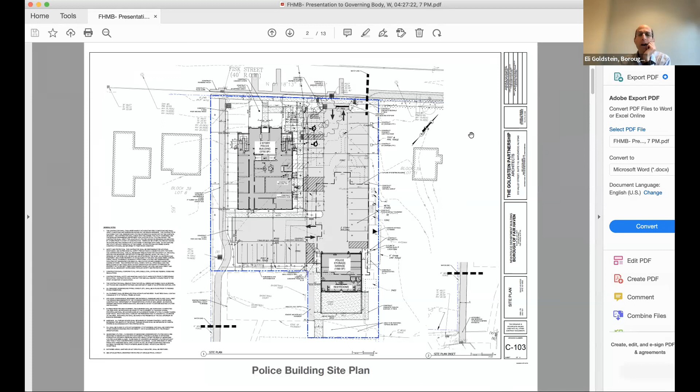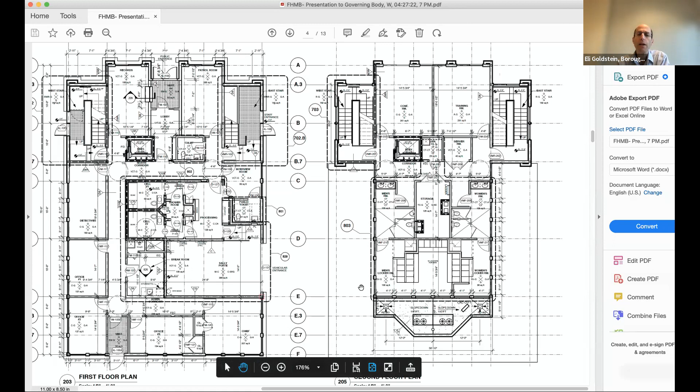And then there's an outdoor, relatively flat roof in the back here, which will contain most of the mechanical equipment, the HVAC equipment for the building. And that's pretty much the organization of the police department.

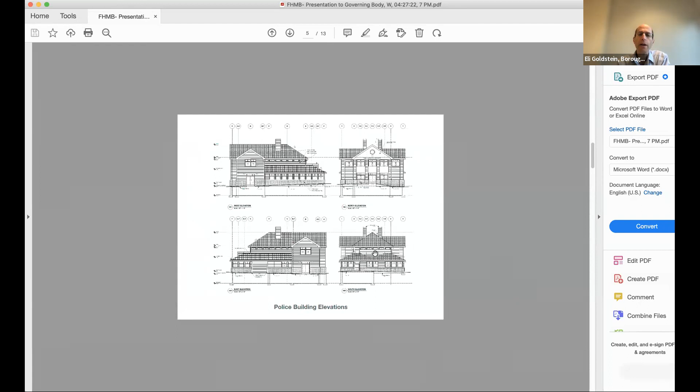On to the next slide. These are elevations of the police building. This is the side that faces Fisk Street, the north.

This is the west side facing the walkway between Fisk and the park. This is the east side with the garage door for the sally port. And this is the south side where there'll be an entrance for the staff to come in from the parking lot. Materials are meant to be residential in scale.

We have residential shingle roofing, residential siding, residential scale windows. And that's pretty much the picture for the police building.

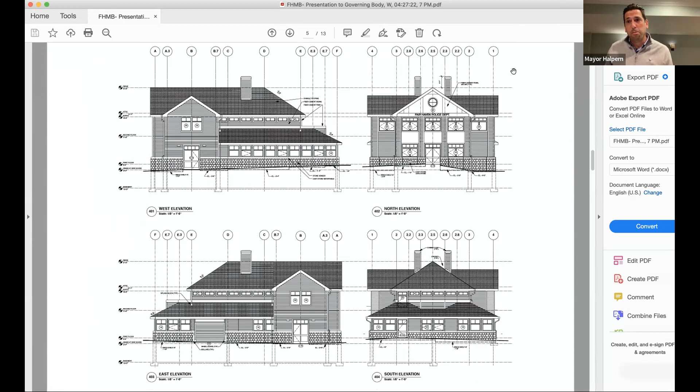I'm going to go in the same direction I guess I would if we were in the basement at Borough Hall. Assuming Councilwoman Christner Keefe is ready to go, if you have any questions for Eli. Can I actually go last, Mayor, if you don't mind? Okay, I guess I can move from the other side of the dais. And Councilwoman Cole, are you prepared with questions? I am prepared and happy to kick us off. Great, thank you, Mayor. Thank you, Eli. Thank you, Rick. Appreciate you being here tonight.

No particular order, I'd like to just dive in a little bit. Do you know the square footage of the community center room that's currently in the PD? Just the one main room. Something tells me, I don't remember exactly, but I think it's something like 1,000 or 1,200 square feet or something.

It's all right, an estimate is fine. It must be about right, I've spent enough time in there.

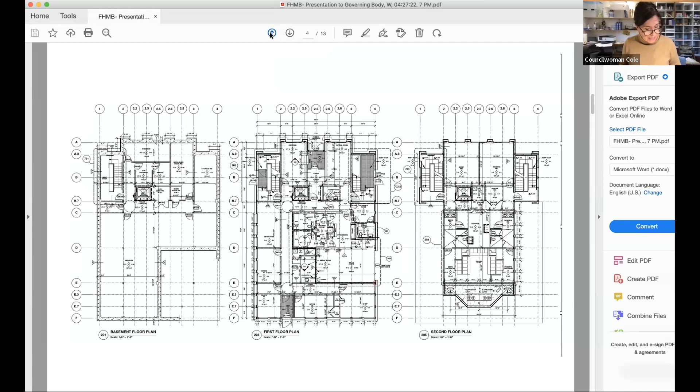So if we could look at the site plan. One of the things we can't see on the site plan are all the adjacencies. There's a reference to residential on both sides. But what we can't see is that to the south, we have basketball courts, a playground, tennis courts, and the fields area, which is a connection that the community really enjoys between the PD and the kids' activities, family things. So it's very important that we maintain that connection.

I know that we have a sidewalk here on the western side of the site that leads to the fields, past the basketball court into the fields. And I also think I'm seeing a fence. So could you please tell me, it appears as though there's a fence between that sidewalk and the building as proposed.

If I may, there's a post and rail fence just to separate the two uses, so to speak - to separate the path to the park from the police function. It's just a post and rail, a 3 or 3.5 foot high two-rail fence, similar to the fence that currently exists between the basketball court and the parking lot in the police parking lot.

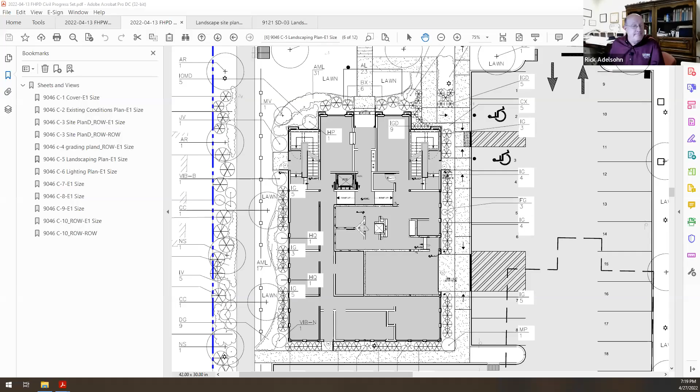I have more slides than Eli does. You want me to stop sharing? You'll share a landscape plan? I certainly can. Let's see, I need to find share screen. I need to share that screen. Share. Did that share? Looks like it's starting to. There it is. Yeah, okay. I feel so much better.

Landscape plan was top of my list. Why don't we have a landscape plan? So on this western edge, the west side of the sidewalk, are those existing trees? Because I know we do have a nice...

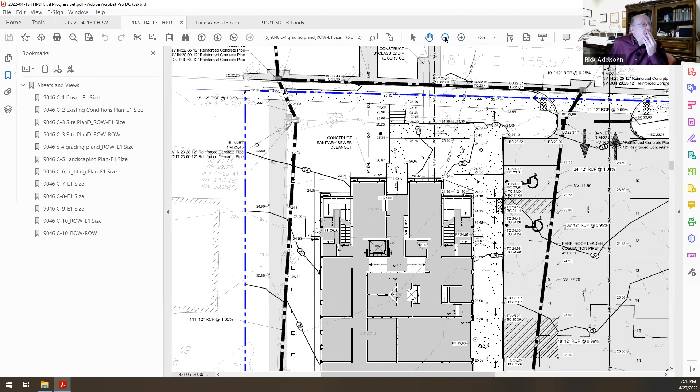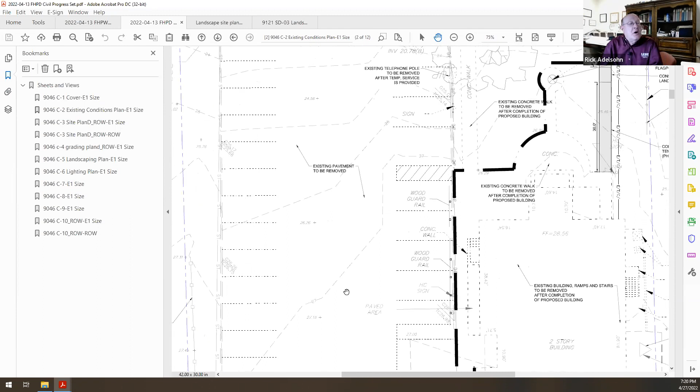Question at the moment. Can I figure this out? Let's see. So I believe we're actually removing the majority, if not all, of the trees on site as part of this project. Unfortunately, the alignment of the driveways and things like that don't allow preservation of the trees between the grade changes and the alignment. So the trees are proposed to be removed.

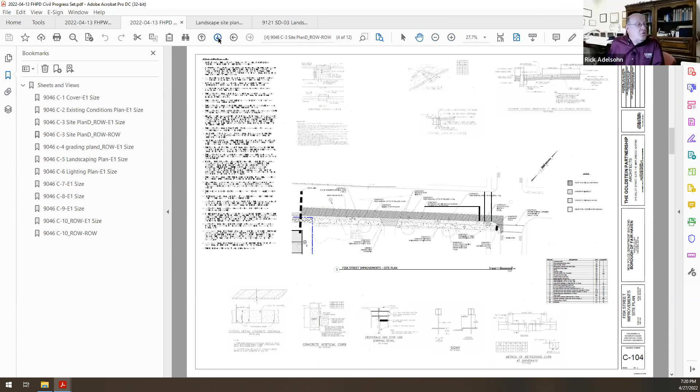So that stand of trees that exists now, you're saying their removal is necessary because of the grade change between the sidewalk and the grade changes? Yes. But if it were not for that pathway, which of course we need a connection, so I'm not saying we shouldn't have one, but if it were not for that sidewalk, would we be able to keep those existing trees? Yes, there is drainage piping going through there that should be clear of the trees, but the sidewalk is the driving force. It's the major one, okay.

Also note there's an encroachment on that side, with the neighbor's property encroaching onto the police property. So that gets cleaned up as part of this as well. Okay, well that's probably best. I'm not sure, we'll come back to this.

So when I spent some time looking at this, there's some terrific little opportunities. If we could look now at... well, one thing before we leave the site plan: there's 7 parking spaces on this south end, and there is no through traffic there. I just want to dog ear that, so when we come back to it, we understand why that's important.

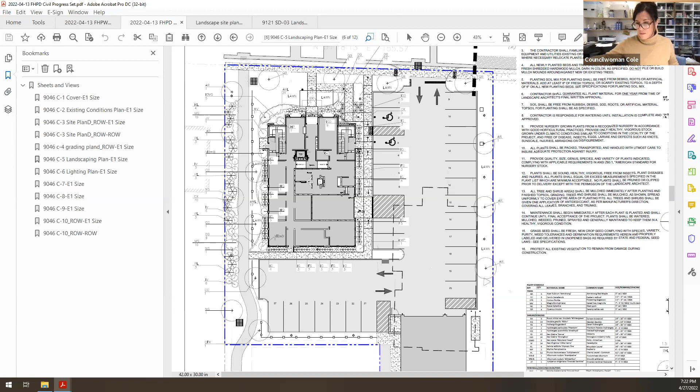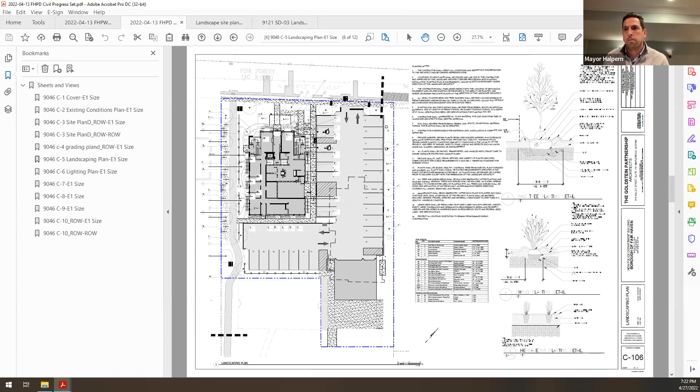Could you please look at the storage building floor plan with me? I guess the question would be, Mayor, do you want to talk about the storage building as part of the police building complex or deal with it separately? Yes, if we're talking about the police storage building, let's talk about that along with the police department. Okay, so I'm going to stop sharing. I should show everybody the plan so that we know what we're looking at.

Hold on. Okay, this is the plan of the police storage building. North is up. So this is a storage garage with the garage door facing north, which contains some cages for police to store equipment. The south end of it is a covered outdoor patio facing the ball fields.

And in between is an enclosed building which contains men's and women's bathrooms, primarily to serve the ball fields. And then the elevations of this very simple building. This is the north view. Here's the garage door into the garages. This is the south view, and this is an overhang that projects way out in front of the wall. And these are the side views of the building.

All right, so Eli, looking at your elevations, we could start there. I'm seeing the north elevation is a garage door, and that's not a man door there, that's a wall, right? Correct, we have a solid wall there, which is visible from the street.

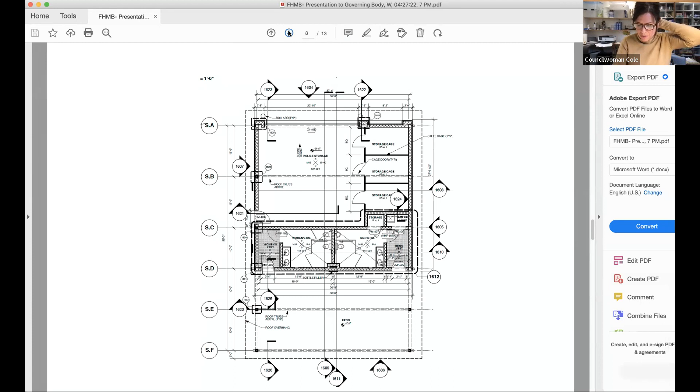Keep in mind, it's completely open up into the gable. So this is the size of the opening. Oh I see, facing south, and it's also open on the two sides.

So there's not going to be any shortage of daylight in there. Well, the gable could be enclosed such that barn doors or collapsing doors could be incorporated, should the community decide that space could be better put to use or made more optimal for additional seasons. That seems like it could still be viable.

The reason I mentioned the wall on this north elevation is because I was imagining walking through the site, and I know we want to avoid taking pedestrians through a parking lot. But one of the natural access points is probably going to be right down the middle of the site, where you would cross between this building.

If the PD is on your right instead of the left, and you were walking past the storage building, it would take you directly to the fields and the tennis courts and stuff. So I want to put that out there as an idea, because it's a very fluid pathway. Pedestrians would only be crossing that section of the parking lot where there is no through traffic.

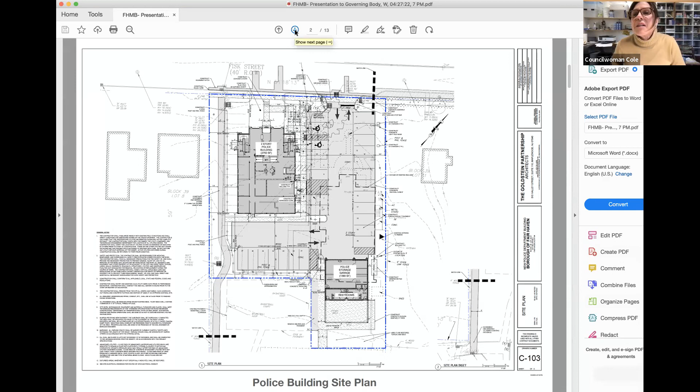We're showing 2 chimneys - I imagine we have things we need to vent, but what are these 2 chimneys doing? Yeah, those are vents. A lot of the air handling equipment is in the attic, and somehow we had to get fresh air in there. We decided, in the interest of giving this a residential scale, since we had to put some sort of vertical vents out of the attic anyway, that we would put them inside rectangular enclosures and express them as if they're chimneys. Chimneys are essentially vents of a sort too. So we needed 2 - this is how we did it.

What is the required height of the vents inside those? Do they have to stick up 18 inches, 24, 36? Well, no, because they're not heating appliances per se. I don't know that there's a minimum height, but there's a minimum distance between them, which had to do with one being an intake and one an exhaust.

So these are, it's personal I suppose, but it's a residential detail that feels a little bit odd on this more institutional building. I can see the effort to make it fit into the residential area, which it does nicely, but it also signifies an institutional feel. The chimneys struck me as slightly off. Well, keep in mind, there have to be some sort of vertical vents coming out of the roof in these locations, and we felt rather than having exposed round or rectangular ducts, that we would wrap them with something that looked a little more presentable.

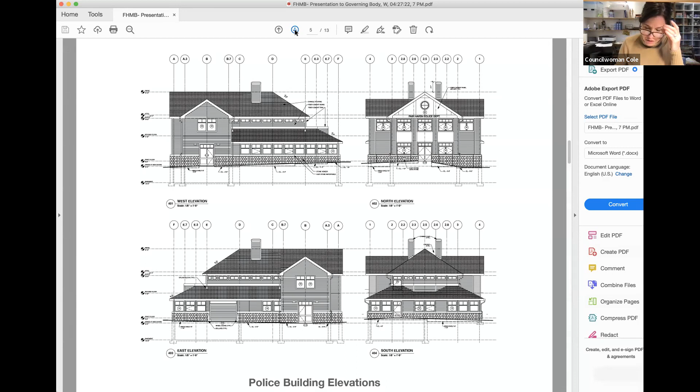I'm sorry, Eli, but on the second floor of the police building, there are two rooms toward the front. I think one says training and one says conference. Is that wall in the middle collapsible to create one large room? No, because folding partitions of that sort are not especially good in terms of acoustic separation. So you could never successfully have activities on opposite sides of them at the same time.

I attended a police training, actually to meet our wonderful force after I was elected, and everyone was in one room. I don't know that that happens a lot, but we needed almost all the space in the community center room. So that's why I was asking, and I'm sure the chief has helped advise you. I assume this entire program has had guidance from the chief, is that correct? Oh yes, absolutely. Okay, thank you Mayor, that completes my questions and comments.

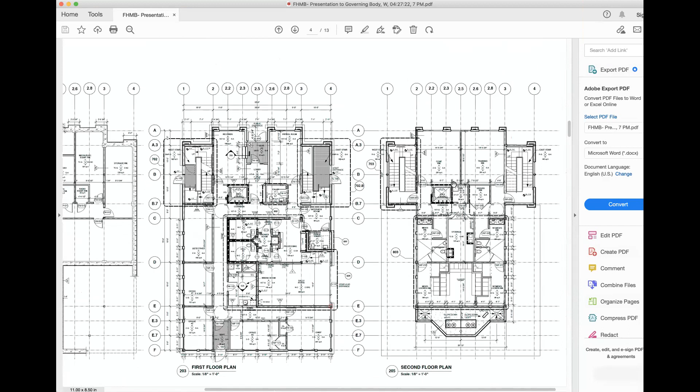Yes, thank you Mayor. I just wanted to touch on a few things that Tracy brought up, and maybe we can answer some of the questions she's had. One thing we're trying to do is keep the police department open until the new building is completed. Can you talk about the impact on the sidewalk, the trees, the landscaping, and the fortification of the foundation of the current PD while you excavate and build the new police department?

Yeah, actually Rick, you could probably talk best about that. I can. So in order to build this, we are using the working area, basically splitting the site at the curb line of the existing parking lot to maintain the existing police station open. Grades and geometry were set so that we didn't undermine the foundations, because the basement on the new police building is deeper than the basement on the existing police building. So we set geometry such that we weren't undermining the foundations of the police building during construction, to allow that to proceed.

Part of the reason the trees are in the way also is because we need that for staging for construction of the building itself. We need to be able to work in that area with equipment during construction, because that path and clear space on the side of the building will be our construction working area. So unfortunately, we're on a very tight site, and keeping the police building open is a controlling factor in the design.

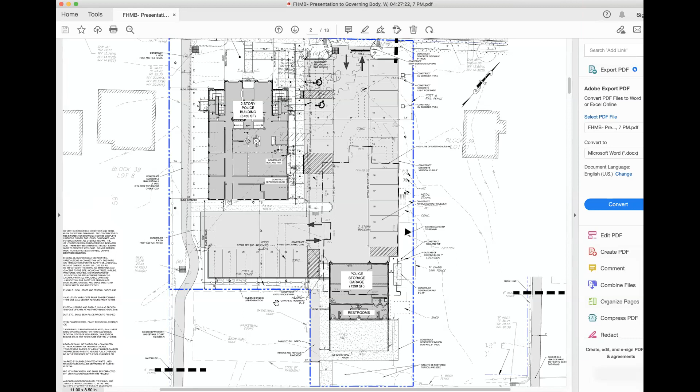Okay, so there are those two nice wide open areas. The doors are on the perimeters, right? They won't be near the water filling station. So there potentially could be those two nice... I'm not sure of the run between the charging or water filling station and the doors. It's about 15 feet either way. So a pretty nice wide open area to do something potentially for rec down the line. That's it on my end. Not too many questions, I just wanted to call out a couple things in case people were wondering going forward. Thank you.

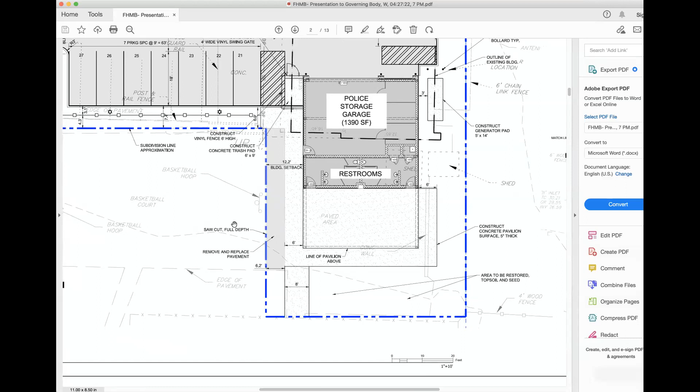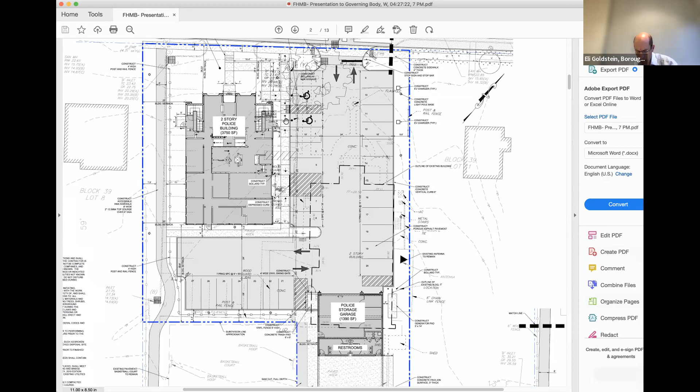Thank you, Mayor. I do have a couple of questions I'd like to pose, but not in any particular order of importance. Could you give me a comparison of the square footage between the old police station and the proposed police station? I don't have that number here. I know we issued something several months ago with those areas, but I don't have it in front of me, I can get it for you. Yeah, that would be important to me. Thank you.

I also noticed on your site plan, the interior plan, you have 2 staircases. Are they necessary? Do you need to have 2 staircases and an elevator? We're required to have an elevator to be accessible under the ADA. Right, correct, I understand that, but my question is, do the stairs need to have 2 staircases in addition to the elevator? Yes, because we need to have 2 means of egress from the 2nd floor. We have only 1 coming up from the basement because it's a lower occupancy, but we need 2 from the 2nd floor.

Can you describe some of the materials that are going to be used on the exterior of the building? Sure. Clapboard siding, aluminum clad wood windows, asphalt shingle roofing, stone base at the bottom of the wall, exposed aluminum gutters and leaders. That's pretty much it, and that's the same palette of materials we're planning to use on the storage building and the public works building.

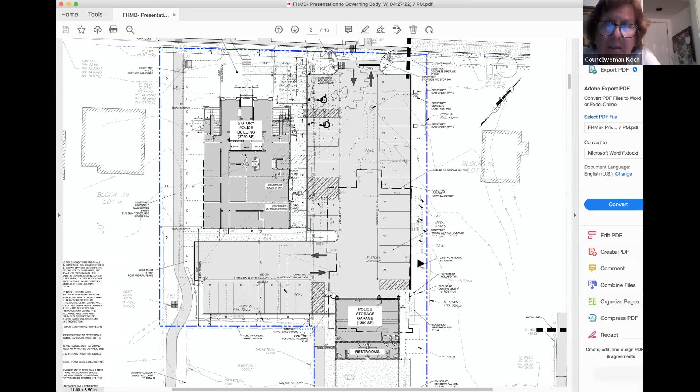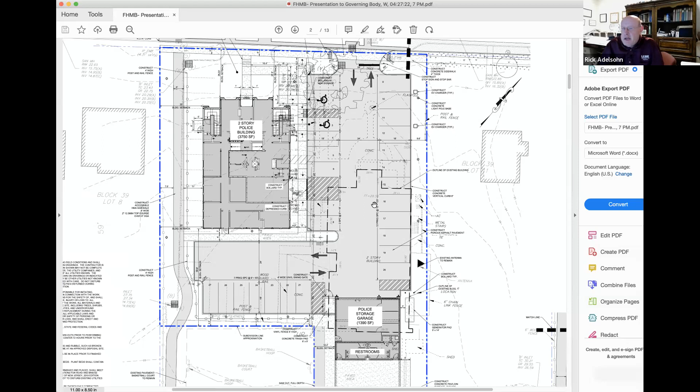And how do you get from the northwest corner of the police storage garage, once you get to that corner from the walkway, to the parking facilities on the east side of the property? You would have to cross the parking lot. Now, honestly, there's not good connectivity to the park from that area. There's a path behind the tennis courts, but that's not going to be a primary entrance the way the park is currently laid out, without changes to the park, which are not part of this project.

I can show you on Google, just to give you a better idea of how the geometry all works, if that helps. That would be helpful. Thank you. Can I share? Yeah, let me find the button to do so.

So the storage building falls in the existing asphalt pavement behind the existing community center. There's grass to the park, but the main path for the park is really on the right side, and actually there's not good connectivity to the park. People go through the field, and the asphalt paths kind of die at the tennis courts. So it's really not currently designed for connectivity between the police station and the park. It's used all the time, I've seen hundreds of kids walk through it. But it's not along defined paths currently. So by adding that path along the west side, we're creating a direct connection from Fisk to the park without going through the police station parking lot, which was one of the objectives of the planning board and the committee we were given.

Right, but that's not my question. My question is, if you were walking along by the storage shed, on the western edge of the storage shed, there's a pathway that takes you to the northwest corner of the storage area, is that correct? So there's a path, and I'm drawing in yellow, which doesn't help. No, I can see it. Let's see if we make it red.

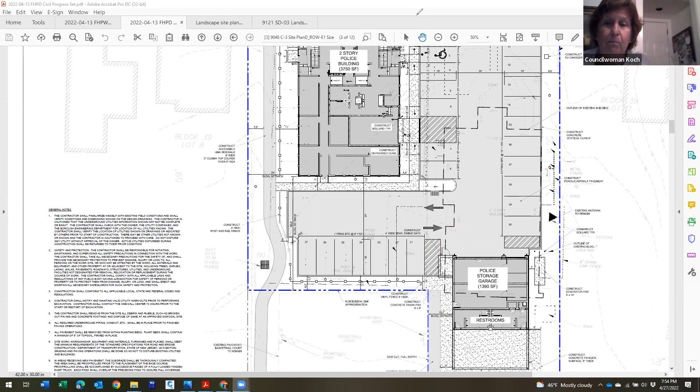I have one final question. I'm not sure, Mayor, you would have to let me know if this is an appropriate time to discuss it. But when I look at the final numbers on the final page of our packet, I am shocked at the expense we are incurring for these two facilities. While we're talking about the police department facility, Eli, if you had to scale the project back because of financial considerations for our residents, is there anything in particular you would choose right now to remove from the project?

Well, really, it's a programmatic thing. That's a question the committee would have to decide, if there's anything that could be eliminated or reduced. There's nothing fancy about the materials - they are very economical construction materials. A police building tends to be more expensive than many other types of buildings because of the nature of the construction that needs to withstand earthquakes.

I understand you have codes and standards you have to build the building to, but in terms of maybe using materials - I noticed you have stone at the lower quarter of the building, you're using Hardie board as siding, and several conference rooms. I'm just wondering, is there any place where you would have the opportunity to scale back? Being the architect who designed the project, would you be able to make any suggestions to the committee and council as to where we might scale back?

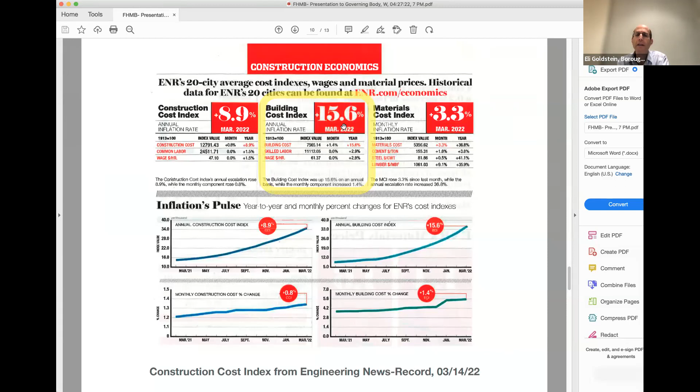So this, for everybody's benefit, is from Engineering News Record, an international magazine on construction costs. This highlighted area, from March 14th of this year, shows that the building cost index had gone up 15.6% in the last 12 months. So this is the basis for the inflation part of our spreadsheet.

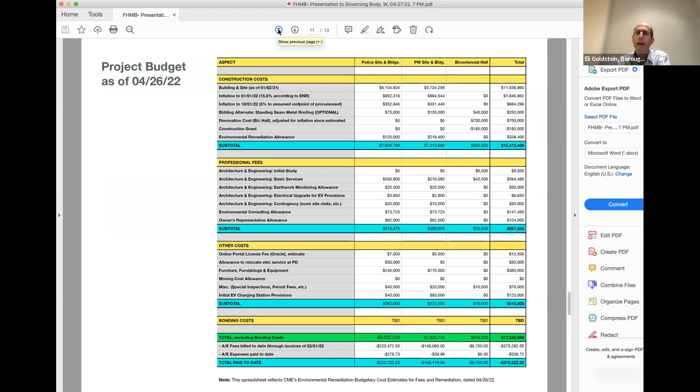Because of the shape of the site, it really doesn't lend itself to addition to the police building, especially because it was meant to serve, with bathrooms, the ball fields. There was lengthy discussion at multiple facilities meetings about the size and contents of the storage building and why it was important to build it. I'll leave it to the members of that committee who are present to answer any questions about that.

Mayor, if I can jump in. Yeah, so if we had attached that building to the police department, it wouldn't optimize the parking, and it would actually go up against the basketball court, which you can see on the diagram, where we're mousing over right there.

The idea was that the OEM, which is moving off of the DPW site and closer to the police department, is the reason we're able to potentially shrink some of the site and the building over at DPW. We didn't really get into that yet, but we're trying to work these two projects in concert to realize some economies of scale, despite what Eli mentioned, which is out of our control, including the price inflation of the materials and the construction itself.

So the best alternative, and we looked at multiple alternatives to where we would put the police storage garage, and this was the best alternative we could come up with.

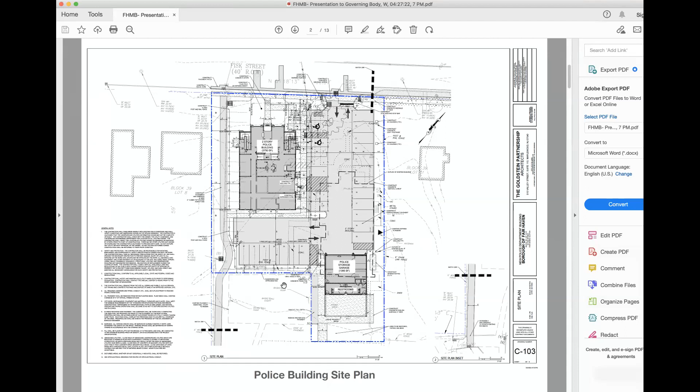I definitely appreciate it. I don't have the benefit of the discussions, but if we were to cut back on anything in terms of costs, and understand that area, Eli, you explaining that building is costing, I think about 400,000 of the total cost. That's what I understood, right? 400,000, I think you said. Yes, that's my recollection, but I can confirm that.

I do wonder how critical it is to have that location used, and whether between the police station, maybe shrinking some of those spaces inside of the main police building, or rethinking some of the DPW space, we could, I'm not even saying not build it, but just preserve that as our rec center. Because beyond these two buildings, we are going to have to figure out where to put the rec center if we lose it. That's an additional cost on top of these two very expensive buildings, given the inflationary constraints we are facing. Obviously that's not under our control, but just food for thought. That would be my main feedback, as one way to rethink that, if possible.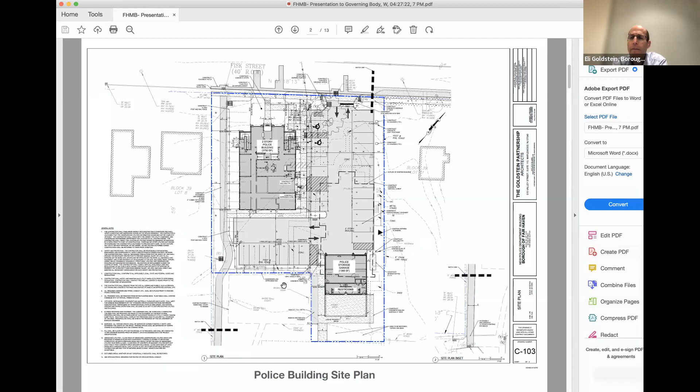So the grades have been revised so that the parking along the back, the south side of the police parking lot, is essentially at the same grade as the basketball courts now. Very similar to what it was.

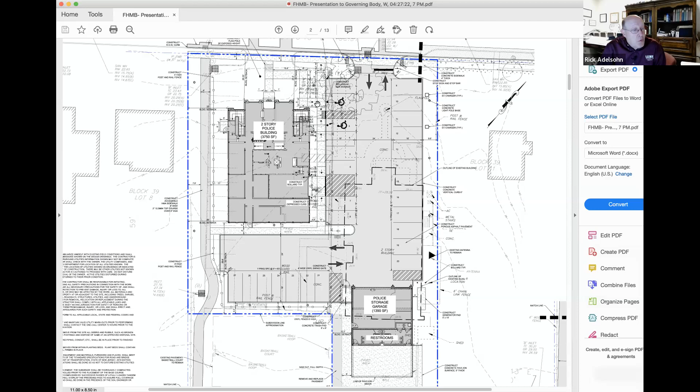We've adjusted the grades. We raised the floor elevation of the building at some point along the pathway - there's a little ramp inside the building to raise the floor a little higher. We worked out handicap access across the front. So we raised the site to make better use of the existing topography, so the grades mesh much better than they had. We managed to eliminate all the retaining walls. So if that answers the question.

Yeah, I was just trying to - I remember part of the discussion last time was there was the basement and the elevation for that. There was a little bit of a change, but yes, I'm familiar with the site and it is not level with the existing street - it slopes up. There's about 5 feet, believe it or not, between this street and the basketball court.

If you could go to the front elevation - I have a recollection that at least one rendition you had presented showed lights on the front of the building reminiscent of the existing lights. Is that just not depicted here, or has that been excluded as an option? That's a good question, I don't know the answer. I will get an answer for you.

And looking at this elevation, the two chimneys - I understand they have a functional purpose. Do they need to be located where they are? Yes, because right under them is the attic that contains all the air handling equipment for the building.

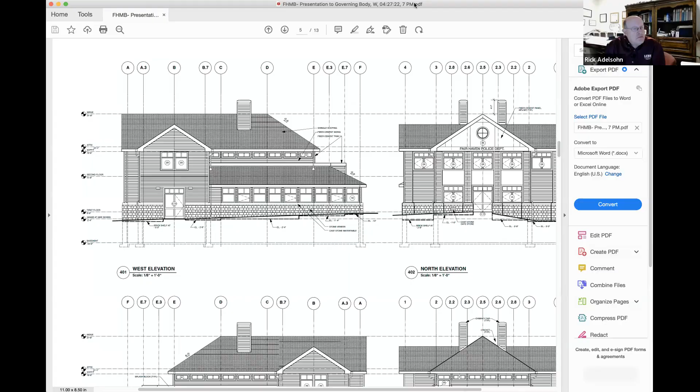All right, so this was the garage - at the request of the chief we consolidated this into one large door. But other than that, this is pretty accurate and up to date, and that's probably the lights you were talking about in the front. The color may be different because the siding color hasn't been selected yet, but this was meant to suggest pretty closely what the building's going to look like in 3D.

And with landscaping. Okay, yeah, that's helpful. Meg, do you get what you're saying about the reference to Knollwood? Yeah, that was my first reaction.

Eli, do these windows open? I believe some of them do. We wanted to limit the number that are open for energy conservation reasons, because windows that are operable, even when closed, are not as tight as windows that are not operable. So we've got, I believe, one operable window in each major space. Okay, and it's like the crank and they roll out? Yes. I think it actually might be an awning type window. Tip up. Oh, I see. Okay.

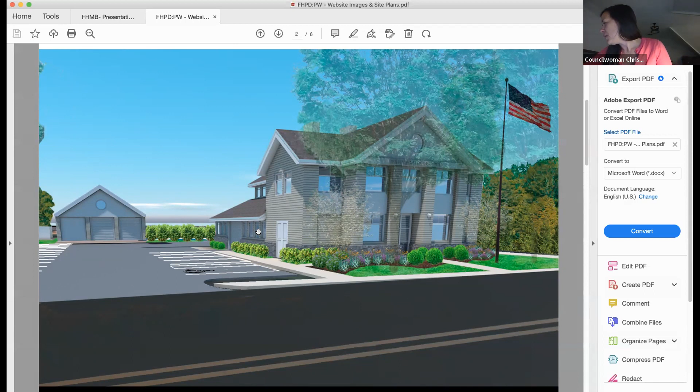Okay, and the front door style, I guess it's hard to see on both of these depictions. Is it intended to be full glass? Let me go back to the elevations.

Give me a moment. Having trouble getting back to where I was. Bear with me a second. No problem.

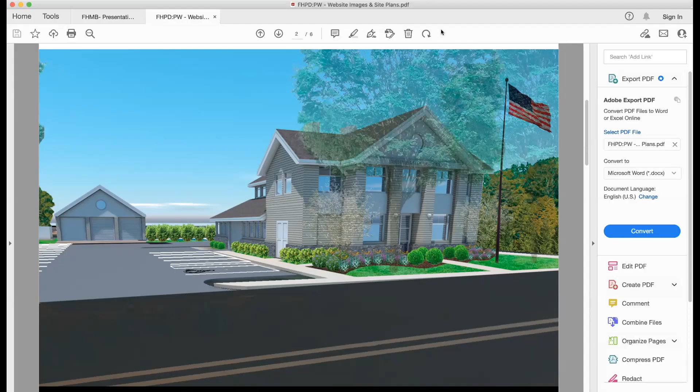You see that all right? Yes. Yeah, so here's the front door. It's meant to be mostly glass. Correct. Okay, and there's a vestibule inside that? Correct.

There's a stone veneer on the bottom of the building. Yes. There's quite a bit of it. And the reason I point this out is because it's really expensive. Of course, it looks beautiful. I'm just wondering if there would be a way to either bring the siding down further or impact that with some other type of material. I just know from my own interest in veneer that it's extremely expensive right now. Well, we probably can at all times, but especially right now. We could certainly look at using like a decorative textured concrete block instead of stone. That would be an easy thing to compare.

Okay, and would there be potentially other materials, or even just bringing the siding down as far as you could, and then with the landscaping in place, it would cover the balance? Oh, well, we can certainly look at that.

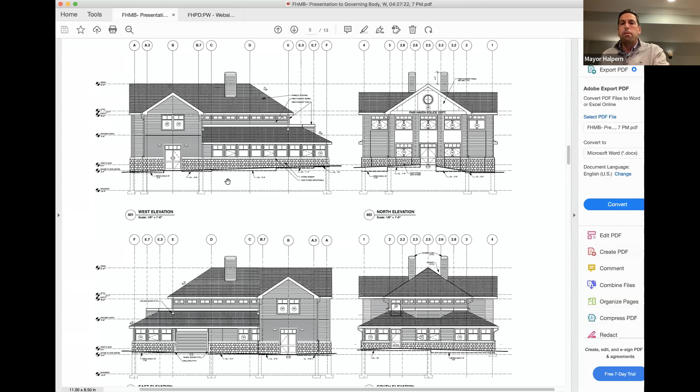Thank you. Hi, Marty, can you all hear me? Yes. Oh, thank you. All right, I'll try to make this as quick as possible and apologize because I'm looking at these plans for the first time.

Is the basement completely underground? That's my first question. Yes. Okay, so there are no windows or anything for the basement, correct? Okay, so that's one question. Another one was, and I didn't see it, but it's tiny.

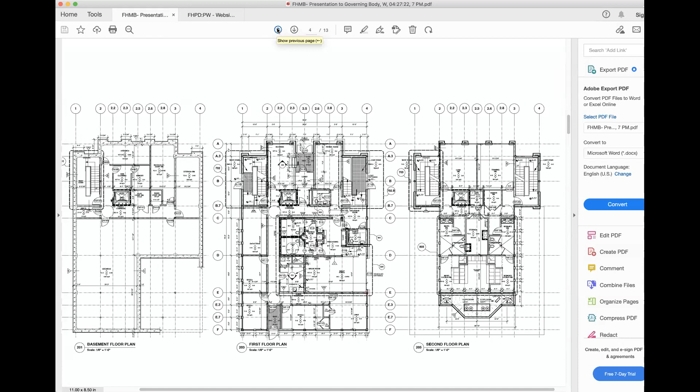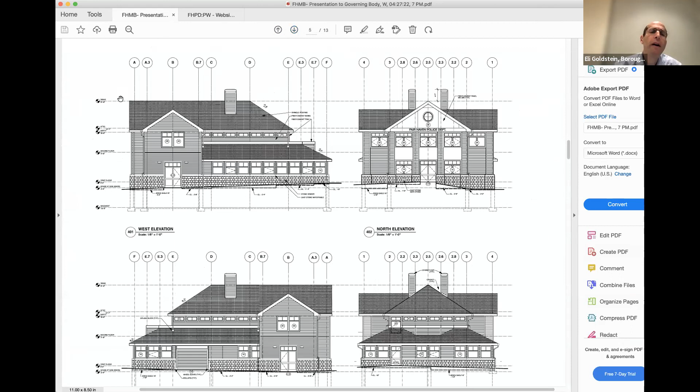What is the total height of the building with the 3 floors, with the grading? For the record, I didn't bring the measured elevations with me. I think it's about 36 feet to the peak, something like that, above grade. All right, so—oh, here it is. There we go, 31.8. It's 31.8, yeah.

And that's with the grading? Well, it depends where you measure from. That's what I'm asking. The grade of the first floor, if it's 0, it's 31.8 above the first floor. And the grade at the side doors adds another, let's say, 3 feet. So it's about 35, 36 feet total at the highest.

All right, and referencing other buildings around that, would it be a lot taller than the other buildings around it, or would it be very similar? It's similar to the 2-story residences in the neighborhood.

Okay, all right, and the heights of the ceilings, the basement and the first floor and the second floor—are they all the same, are they different? The first and second floor is typically about 8 feet. 8 feet.

And I think the basement might be just slightly less, and that's because the water table is quite high in this area. We didn't want to dig down into the water table. Rick, you can talk more about that.

Okay, thank you. And this is just a comment, because they can't speak for themselves. We're on the eve of Arbor Day, April 29th, the 150th anniversary of Arbor Day and the 50th anniversary of the Arbor Day Foundation. We're very concerned about our status as a tree city, and we've also been concerned about clear cutting some properties in town. I would mourn mature trees coming down just because it would make the staging easier. So I have spoken for the trees.

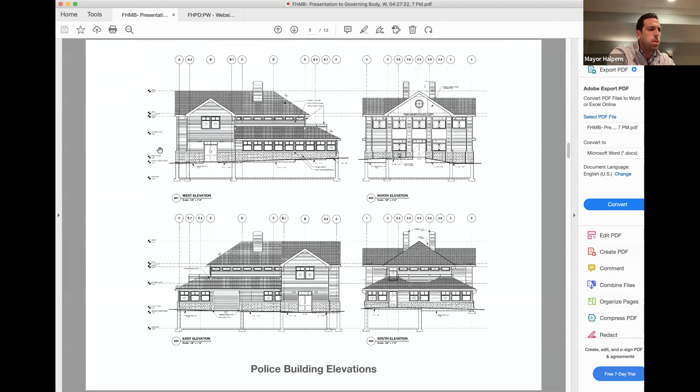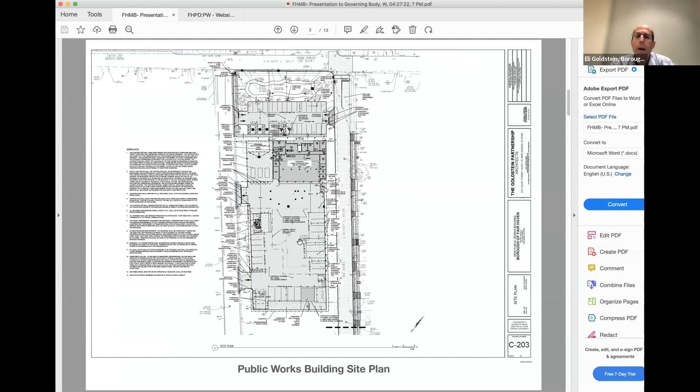Here we have the site plan for Public Works. I'll give you an overview and then ask Rick to fill in some of the details. This is 3rd Street on the north, and on this side we have Maple and Allen. The existing Public Works building is down here in this neighborhood, let's see it, I think just dotted right there. We're proposing to build a new building much further to the north and redo the yard, creating a public parking lot on the north, separate and apart from the yard to the south. The idea is separating the public from the operations of the yard, which is different from what currently exists. I'll ask Rick to fill in some information, and Rich Gardella, I believe, is on the call too, in case there are any questions about the functional aspects of the program. He can answer those. Rick?

Sure. So as Eli mentioned, let's see. Eli, can you pan down just a little bit on that?

No, other direction, sorry, to the north. Just along 3rd Street, the front side of the site, we have a bioretention basin along the front of the property.

Behind the bioretention basin, we have a 30-car parking lot with two-way access from both Allen and Maple on both sides. In that lot, 3 spaces are marked for recycling, plus 2 handicap spaces, and we have an EV charger for 2 spaces.

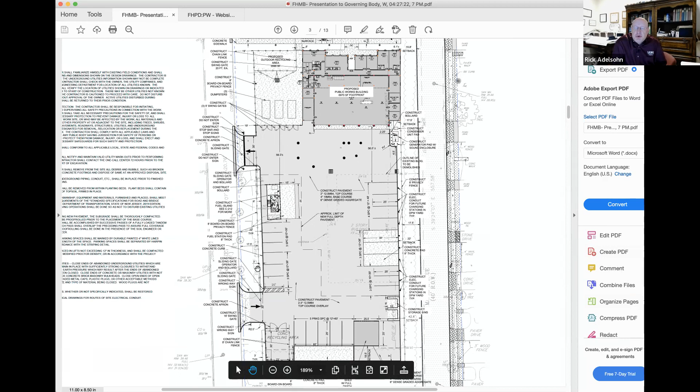Not shown here, but you'll see a series of dots in the parking lot just behind the building—we have an underground detention system there for stormwater management, along with the bioretention basin. We also have a series of water quality filters in the parking lot, because we didn't want to take water directly from the DPW yard without pre-filtration.

I think that's the highlights of this. And there are off-site improvements: curb and sidewalk along Maple, plus some limited improvements, actually a realignment.

Eli, you want to go all the way up to the top on 3rd? We are showing a narrow widening and realignment on 3rd Street to carry the curb line from the east across the front of the site, widening 3rd Street just a little bit.

The road improvements on Maple go all the way down to—I'm drawing a blank on the name, starts with an H—it's actually on the next page, which doesn't help you. Hendrickson, thank you. Yeah, I don't have it... what else?

Lastly, we have storage—I'm sorry, I also forgot the police impound pen in the back left corner of the yard. So I think that is the DPW yard. It's getting smaller than it was.

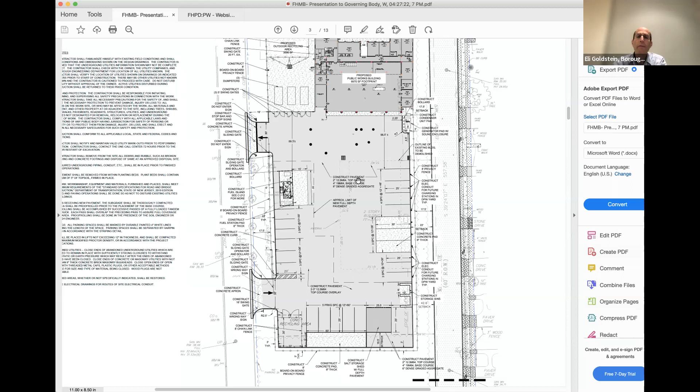Thank you, Rick. So now I'll go to the floor plan.

Here is a plan of the proposed building. There's the entrance facing the public parking lot, a workroom for staff, several staff offices, a multi-purpose room, a conference room, and this is the vehicle garage with a vehicle lift.

There's a mezzanine along the back to increase storage capacity on top and underneath it, plus various storage and equipment rooms, and another tractor garage. So there are 5 large bays and a smaller tractor garage.

And then, as Rick mentioned, this recycling area is accessible by the public from the parking lot and from the yard through these gates.

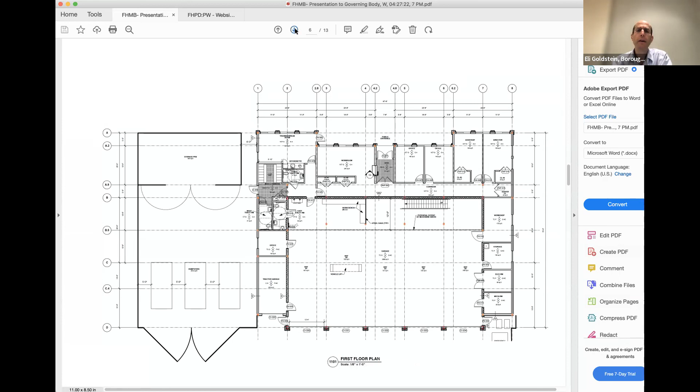If we go to the next page, these are the elevations of the building. This is the view from the north from 3rd Street—see the familial similarity with the vocabulary and materials we're using in the police building.

This is the view from the yard with the large truck bays, and these are the views to Allen and Maple on the side, using the same materials as on the police building and the storage building.

So I guess, Mayor, I'll turn it back over to you. Thank you, Rick. Thank you, Eli.

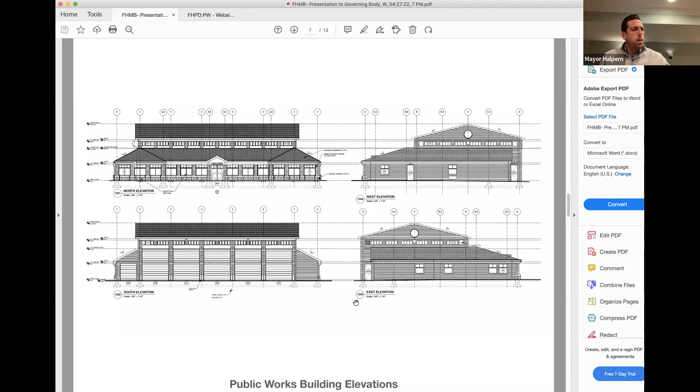Getting back to our council member questions. Councilwoman Cole, are you prepared to start us off again? Yes, I am, Mayor, the floor is yours. Thank you.

Eli, where did the program for the building at the DPW site come from? It came primarily from Mr. Gardella, the head of engineering, the town borough engineer, and Rich is on the call in case there are any questions about it.

This is a significant structure for a DPW yard. It's really nice, the layout is great. I'm counting roughly 5 offices, 4 bathrooms, 2 workshops. Obviously we need the garages. I understand the site and the layout. What I'm struggling with to get to the point is, I'll just say fancy - this is sort of a fancy structure for the DPW.

I share the concerns that both Councilwoman Neff and Councilwoman Koch expressed. No doubt others feel the same. These are very expensive endeavors. The funds the borough has committed already just to get to this stage have been exorbitant. I don't need to tell you that, I know you know what we spent. This is a very elaborate DPW building. There's nothing not to like about it, it's quite lovely, I like the way it's laid out. I just think it's a little bit too much.

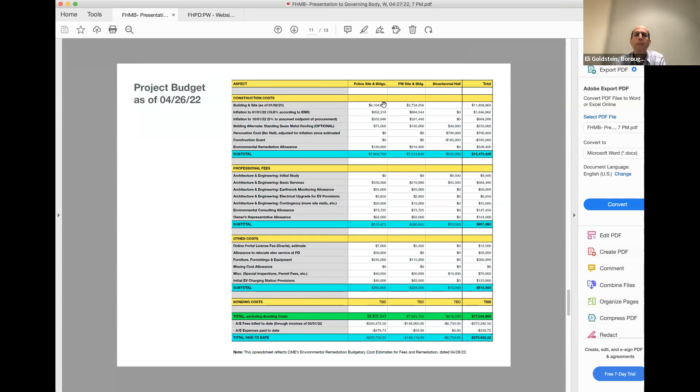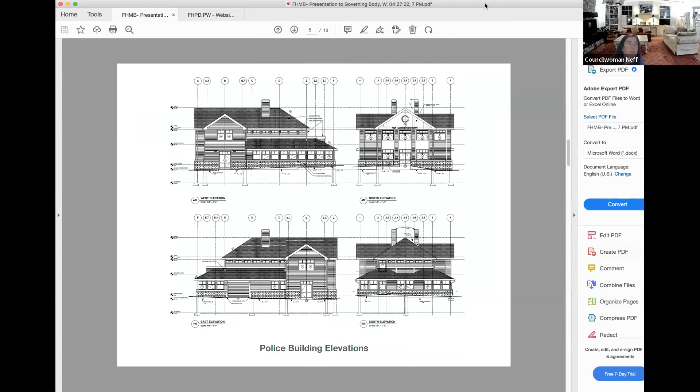Yes, if I may jump in for one moment - it would be great if we could have a better breakdown of those costs. I had the same question. The DPW building is only 1 floor compared to the police building, which has a basement, a first floor and a second floor. This cost seems very high to me as well. So it would be helpful if we had a better breakdown so we could understand how much of a burden that building is as part of this cost. Sure, yep. Thank you Councilwoman Neff, I agree that would be helpful.

And I'll just say that perhaps there are some value engineering opportunities in the building, because I do think the investment in the site is appropriate and important for our DPW. So there's a lot of roof here no matter what, because we have these tall garage doors.

I want to know if you guys have explored solar. There's some terrific incentives right now for solar. We want to make sure these are buildings for the future, not just the next 30 years, but ongoingly. That would help cut down on maintenance costs, annual maintenance.

Yes, our structural engineers designed the roof to carry the load of solar panels. We have not put the panels as part of the building project, but they could be easily added in the future. Okay, and did you identify any estimates for what that might cost or what the offsets might be? Or not yet? No, that wasn't part of our charge.

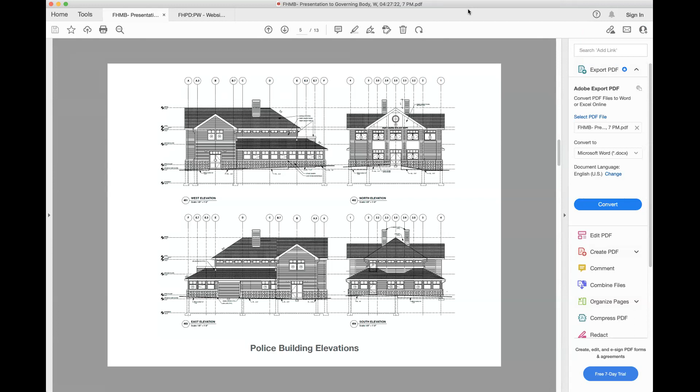So were you given any direction regarding solar from the committee? We discussed with them whether they wanted to put in the provisions now, and they decided they would want the building to be able to easily accommodate them in the future. I believe it was covered at length in the capital review with the planning board. And there was significant commentary by the public, specifically folks that live in and around that community, in terms of birds and reflection of the sun off the panels and heat coming off those panels as well. So those were all considerations. So we designed it such that in the future, if we can find panels that don't have glare and don't throw off heat and don't impact the ecology around it, the building would be able to support them.

But if you're looking for ways to reduce the cost of the building, this was part of the consideration. We can always add them though. Okay, thank you very much.

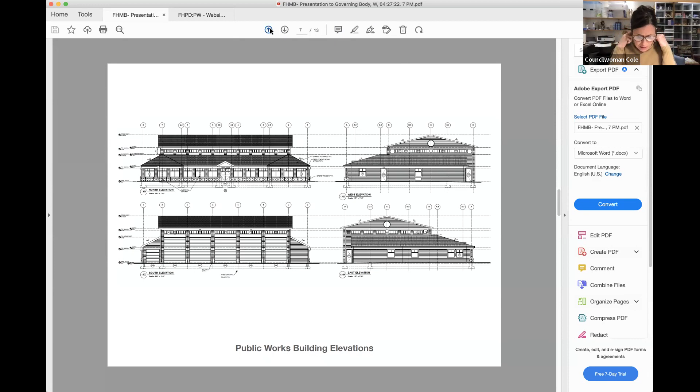My chief concern has to do with the landscaping and the buffer between the neighborhood and the site. I see chain link in a few places, and I think I see 8-foot board on board, but it's very small type. So Eli, or perhaps Rick, if it's a site issue, could one of you show us, maybe starting on the west side where I think it's most crucial, the buffer plan to separate or insulate the neighborhood from the activity on the site?

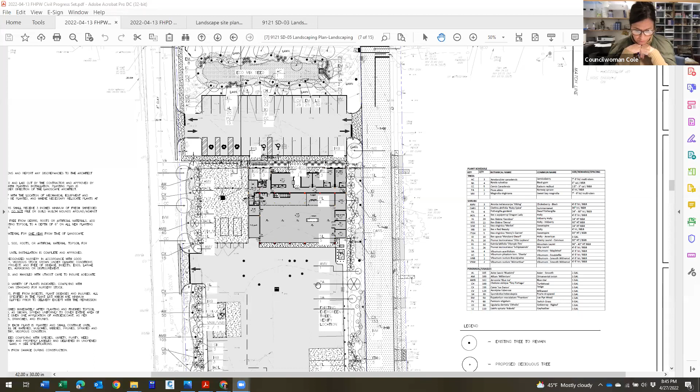Rick? Rick, you're on Zoom, you're on mute. Am I sharing? Yes. Okay, so I pulled up the landscape plan.

That's great. As you can see, we are heavily landscaped around the building along both the east and west sides. We have board-on-board fences around the recycling area, and open wrought iron style gates across the driveways. Again, board-on-board fences, 8-foot high, going down around the building and across the back and around back up on Morris. The only chain link fence is around the police storage area and generator. Everything else is board-on-board fencing.

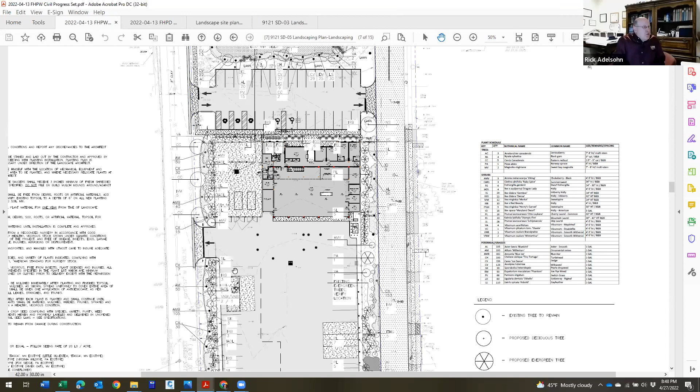You do like to be able to see through the gate as you approach it. At least this gives you the opportunity to see what's happening outside before you open a gate, because you can see through these gates.

I'm going to make the case that whatever we can do to insulate the activities and day-to-day workings of the DPW site, we should take steps to do so for the residents on that west side of the lot. I understand what you're saying about the weight of the gates and the additional mechanisms required to operate them, but perhaps there are residents who can talk to us about what sort of impacts they're used to dealing with. I don't know if it's mostly noise, trash blowing around, or traffic, but I'm sure they can help direct us and let us know what the top concerns might be. If it is noise, that might help.

Mayor, that would conclude my comments and questions on DPW. Thank you, Councilwoman Cole.

Councilman McCue, if you are ready to roll, the floor is yours. I don't know if you're speaking. If you are, you're on mute.

I don't hear Councilman McCue. We'll come back to him. He seems to be on and off logging again, Mayor. Do you want me to move on to Councilman Koch and come back to him? Mike, can you hear us or can you talk? He's muted. Yeah, sorry, I lost you guys again, but I'm back. All right, Councilman McCue, if you're ready we can move on to Councilwoman Koch and come back to you, or if you're ready to roll, it's your turn for questions on DPW.

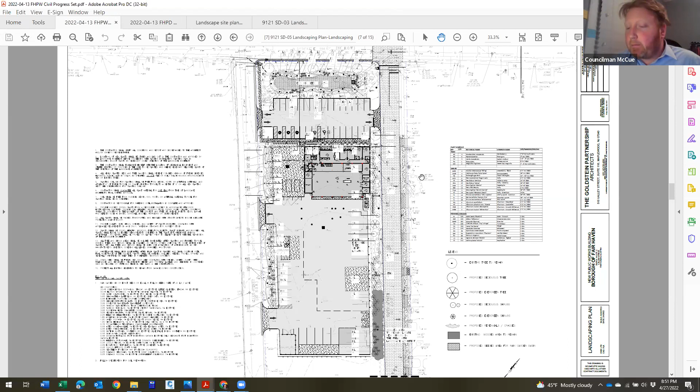But ultimately, government is a game of compromise. I'm at least happy with the small victory that the roof line is structurally sound enough that in the future, maybe when more people get on board with solar, we'll be able to quickly adapt that roof line to solar without additional reinforcements.

I did get cut out a bit. The programming for the DPW, Councilwoman, I think you brought up a good case, as there have been some considerable changes. Regarding storage, roof lines and stuff like that have changed and ultimately affected the cost. But then again, I believe we want to get this right for the future, and I think we're in a good spot going forward. We've sacrificed some things.

One thing is recycling costs have gone up, as we know, but cardboard is still a relative commodity. As called out in those three squares, one of them will be a designated cardboard bin. And although it won't be covered, because once cardboard gets wet it loses its value, there are other solutions, such as what I think are called dog sheds, essentially a covered dumpster, so that commodity retains its value.

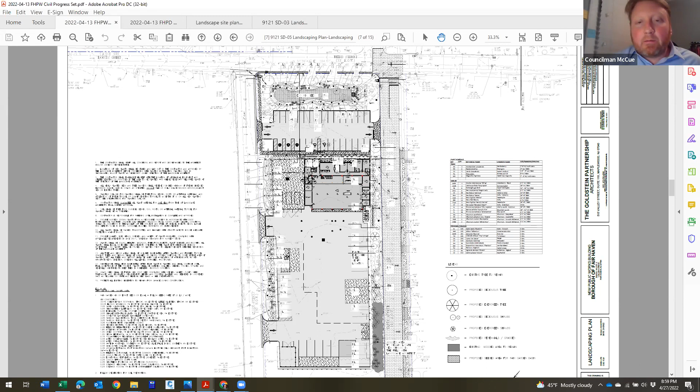Also keeping in mind the office space for this - zoning, planning, Nick, Rich - we'll have new offices here that won't take up space down at Borough Hall.

So that kind of flex space, I think, is also a benefit coming our way. I just wanted to call those things out, and thank you for your time.

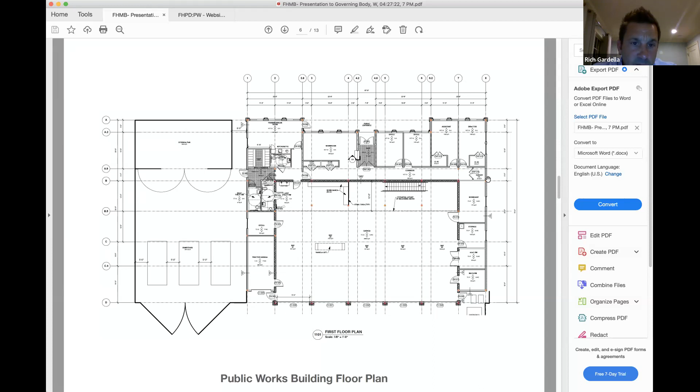The other two spaces include, if you zoom in, in the front of the building there's a workroom - basically computer workstations for staff members. Right now we have a small area with some computers that allows them to check email and do the work they do on a regular basis, and have that much needed space to continue those efforts. It's more of a general open office space for the staff.

The training break room is exactly what it is - a break room, a lunch room, a training room based on all the training we have to do annually. As Councilman McCue mentioned, it does offer a plan B for the public if we need additional flex space. We added that exterior door, that the mouse is showing there, for the public to come in and access that space, whether for a meeting, during a storm, for Wi-Fi, or whatever the case is.

The other spaces are the offices. Land use, planning, engineering, and public works are all going to be encompassed under this roof. Currently we're working out of two locations, the basement of Borough Hall and crammed in at DPW right now, sharing desks and space, and we also work out of our vehicles since we're on site for parts of the day.

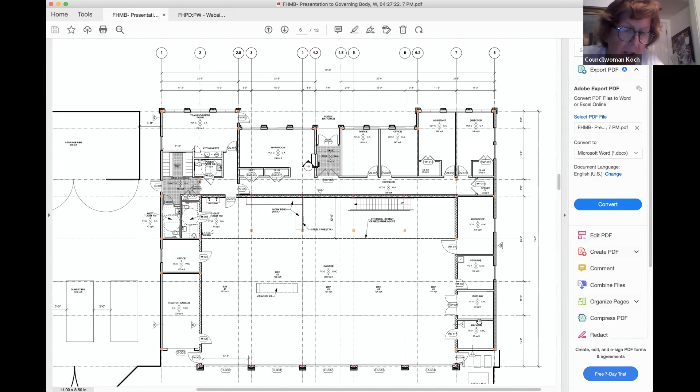I do have a couple of other questions. I'm not sure I understand the potential—it says here potential extent of mezzanine above. I assume it means that's the possible border or outside wall of the mezzanine. What is the function of the mezzanine?

The mezzanine is to allow for storage of DPW supplies and equipment throughout the 12-month cycle, so we can provide our operation as we do now. Right now we've got those 5 large storage containers on site down by closer to 3rd Street, which are unsightly and obviously going away. We also have some additional space in the existing building on the south side, which provides overflow currently. And then going from 6 large bays to 5, we're shrinking things down a bit.

Based on the design of the structure and the height of the interior roof within the garage, the mezzanine is a cost-effective way to utilize that space above. As you can see, it's accessed by a stair, and it also allows us to tuck things underneath, like workbenches, some vehicle maintenance equipment, tools and equipment. We currently have some type of makeshift mezzanines in our garages in a couple of the bays, but this would provide a more suitable arrangement and more accessible.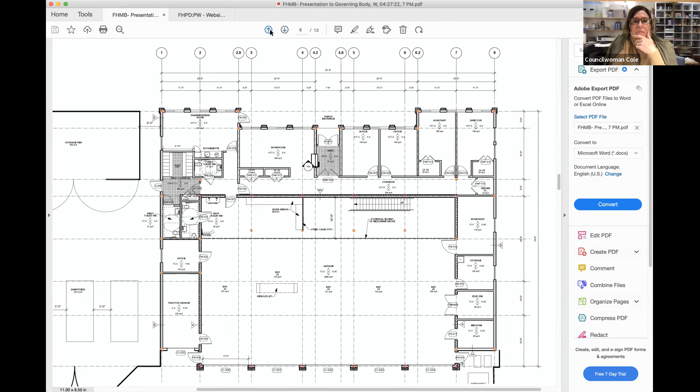Okay, thank you. I just have one or two more questions. The charging stations that you referred to in the parking area at the northern end of the property—my question is two-part. You're not putting charging stations at the police department, you're just putting in conduits that would make it possible in the future to install charging stations, is that true?

I believe the intent at the police station is to make ready spaces, also make ready spaces along the fence line on the east side in the yard for DPW equipment, possibly in the future, although that's probably significantly further out based on the progress in the construction industry of coming out with electric vehicles that can handle long-term use.

So where the site plan is, you have indicated there are charging stations - is that not actually going to happen, or is that potential? There are two charging stations proposed on the east side of the parking lot, right in front of the two offices that bump out just a little bit.

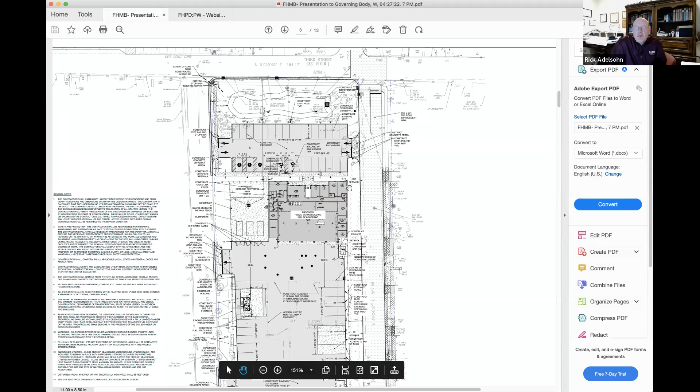Can you zoom in? Right there. Correct, so can you show me that - there are two chargers? Construct where the two EV chargers are. It's a two-station charger.

And is it expensive to install, and is it free to the residents to use and charge their cars anytime they want? I mean, how does that work?

So how it works is not yet definitively defined. You can get systems where you have swipe cards and take credit cards for anybody who parks there to charge. You can make it open public, which some municipalities do.

As far as cost, there's a cost associated with the conduit. There's the cost of the charging, and the cost of the chargers itself. That is a double charger.

Would this be under contract to somebody, so the maintenance would be included, or is it just for the borough itself, where they would have to arrange for installation and maintenance? Right now it's specified as a stanchion with two charging ports, without the communications features for billing and things like that. We were not given direction to look at that.

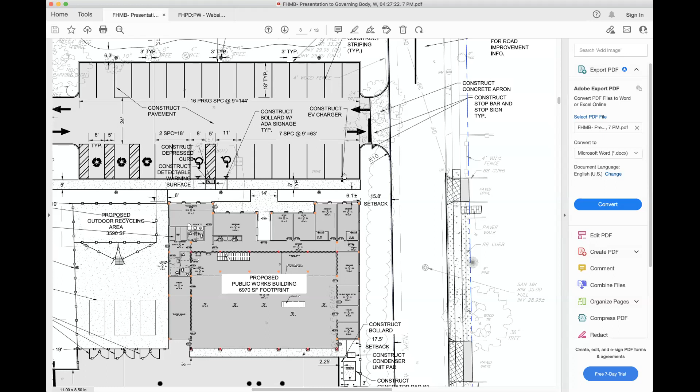Okay, one last question associated with that. Councilwoman Cole, I just wanted to give you some of the thinking about the charging station - I could do it later, or I can give it to you now. You can say it, but I just want Chris to ask a question. Sure. Pardon me, I was just going to say Chris, you're up next. So Councilwoman Cole, why don't you finish your thoughts, and then Chris can jump in.

Okay, so we live in a town that's less than 2 square miles. If these chargers are for the convenience of the residents, wouldn't they be driving around in a charged vehicle already? And even if something happened to the vehicle, you could walk home if you had to. It seems like a lovely, expensive amenity for our residents - I don't know how many electric vehicles we actually have in town that would take advantage of that amenity.

If I may - at least in part, they came about because, as you know, the state passed a statute, I think in July if I'm not mistaken, mandating EV stations - 15% EV charging stations in parking lots on commercial and residential developments. This was in response to that, at least in part. The discussion was that we could provide 2 parking spaces in this lot, but you really didn't want charging in the police lot for the public, and obviously didn't want people coming into the public works yard. So that's at least in part why those are there, and I'm sure Councilman Rodriguez can elaborate further.

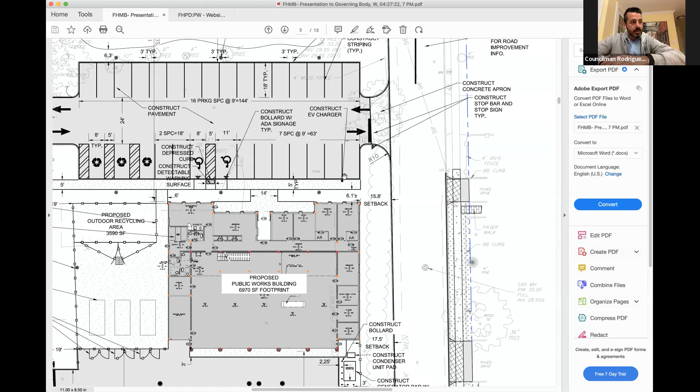Thanks. I won't talk much more about it, Councilman McHugh touched a lot on the charging stations. We discussed it for many meetings, and it seemed like almost every meeting, it felt like the solar panels, we put a lot of thought into it.

So we could always remove them. We thought it would be forward thinking, something the community would want to see. We didn't think it would be a big moneymaker for us, also didn't think it'd be a big money loser either. We weren't thinking about giving out free energy at the expense of other taxpayers, because we pay for our power.

So to that end, I'll leave it at that. We could take them out, we can put them in. We do foresee vehicles moving in that direction, especially if our $4 gasoline goes to $8 or something to that extent. So this is just something we should consider for the future. But none of this is etched in stone.

It comes up often, and we tried to find ways to design these buildings in the most cost-effective way. We didn't want to put expensive materials in, to the extent that we can find reasonable alternatives without compromising quality. We don't want to build a building that's going to fall down in 20 years when we could pay for the quality construction and materials needed for something that'll last 50 years.

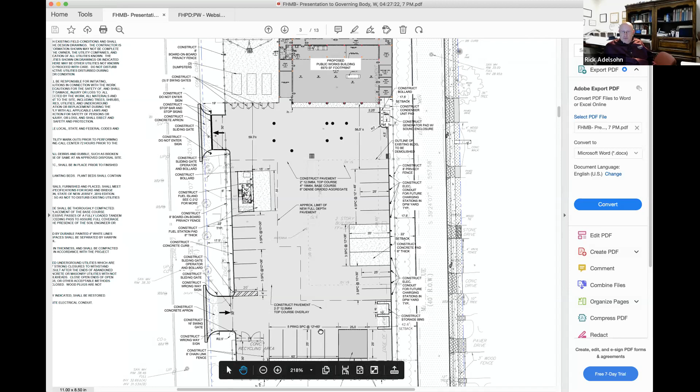On the southern side of the yard, did that encroach a little bit into the wooded area? It does encroach a little bit into the wooded area. Do we know how much by chance? About 7 to 10 feet, something like that. Right there. Got it. Thank you. Thank you, Wilson.

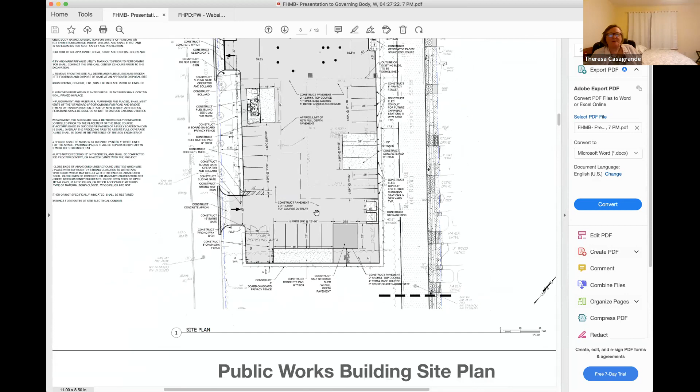Mayor, I have Bob Gasparini with his hand up. I also will say, Bob, for the benefit of the public and council, Bob Gasparini is a member of the Facilities Committee. Hi, Bob. How are you? Good. How's everybody doing tonight?

Good. Appreciate the time and effort. As a member of the committee, it's been many hours and many discussions to try to make sure that we produce a product that fits as best as possible into the community, keeping in mind the residents that surround the areas.

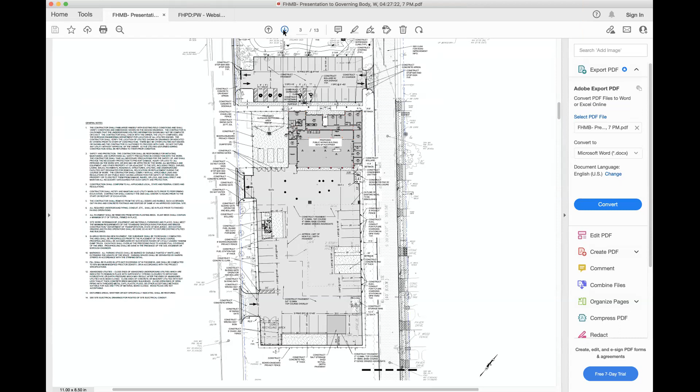Eli, I've been listening to the comments about the scale and the size and the look of the building. And honestly, when it was first brought up, it does seem like a very large, grand structure. Can you bring up the site plan or the rendering from the planning board? Just to give an idea of what it looks like on the site. I think it might help in understanding how it fits into that spot. Let me see if I can find it. Bear with me a second.

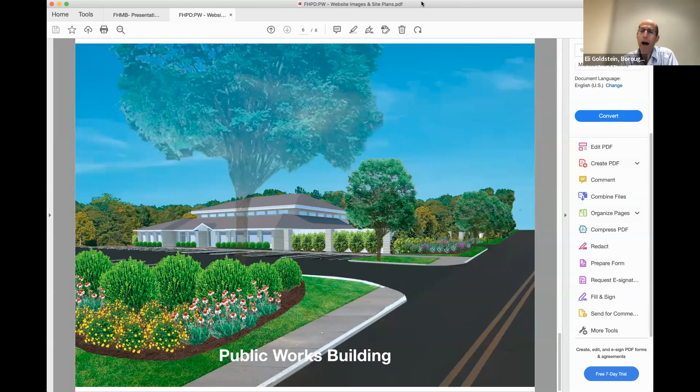The overall height of the building is relative to the other structures in town as much as possible, basically the same height. Correct. In one of the earlier iterations to the Planning Board it was taller, and we cut it down significantly to assure it would be no higher than the prevailing heights around. Originally there were offices upstairs, maybe a true second floor, but there's a partial second floor.

My other topic was the materials, which other council members have mentioned. There were also many lengthy conversations about the types of materials we wanted to use, the cost of those materials, and what the savings would be to go to something else. Overall we were trying to keep in mind the cost-benefit analysis: if we save 20% on the cost of the siding, what are we giving up in the long-term durability of those products?

Especially for the DPW building, there's a lot of traffic, a lot of heavy equipment traffic, and exposure to a lot of different elements. I think the idea to use materials that will withstand time and the elements best, even if slightly higher cost, will yield a much better benefit for the community over time, versus trying to save $50,000 to $100,000 over both buildings by moving to something a little less durable.

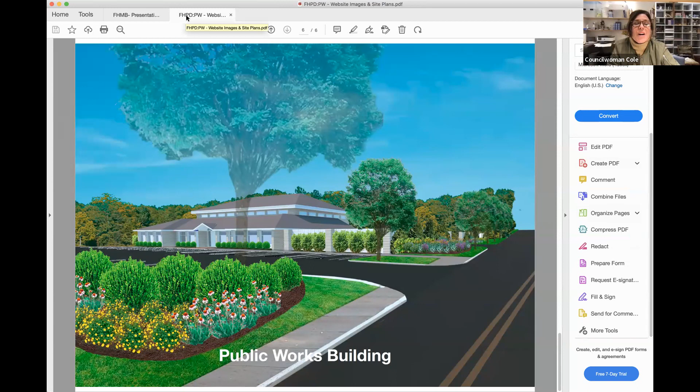Eli, can you go back to that slide for a second? Thank you, Bob. Sorry, Mayor. It's okay. I think we should call Bonnie Torsivia and Wendy Murphy right away, get them over there to measure that tree for the big tree hunt. That is a beauty.

Teresa, is there anyone else? Yes sir, Maritza Owens has her hand up. Go ahead. Hi, it's not Maritza Owens, sorry, I realized I'm just using my work account. It's Liz McNeil. Oh hi, Liz. Sorry about that, I forgot I was on my work account. I just wanted to pop in because I live on 3rd Street, between Church and Maple, and I just want to say thank you.

This is a gorgeous building. It's been a little anxiety producing for everyone in the neighborhood, wondering what was going to replace it. To see that it really fits in with the scale of the neighborhood is a huge relief. To see that there's all this extra parking is also a huge relief, because it's really becoming a real issue with the increased use of the 3rd Street playground. I think it's just beautiful, and I want to say thank you.

I do have one question, and if you covered this already, I apologize. Did you guys discuss putting in a power wall? I know you're talking about putting in solar panels, but since you've got the chargers there for cars anyway, what about a power wall?

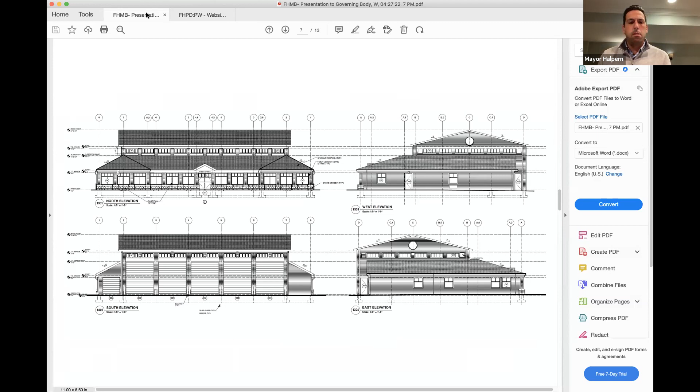Thank you for that suggestion. Teresa, is there anyone else with their hand up? I did not see another hand. Unless someone still wants to speak, you can raise your hand. Otherwise, I believe that's the conclusion of the questions from the public.

I wanted to thank everyone here. Just a little rundown on next steps: we're going to have a review of the financing and tax impact with our CFO, the financial advisor, the bond counsel, and the finance committee. Those figures will be shared with the full governing body prior to our special 5 p.m. meeting on May 25th. I wanted to thank Eli and Rick for the considerable time spent tonight answering everyone's questions and preparing these plans. I'd also like to thank the facilities team for all the time they volunteered putting these together, the entire governing body, the council, Brian Mead, Rich Gardella, the chief, thank you for being here, Allison and Teresa, and all of our resident contributors tonight. We appreciate you getting on here and giving us your thoughts. Thank you to everyone, have a great night, and we look forward to discussing this in more detail in the future.